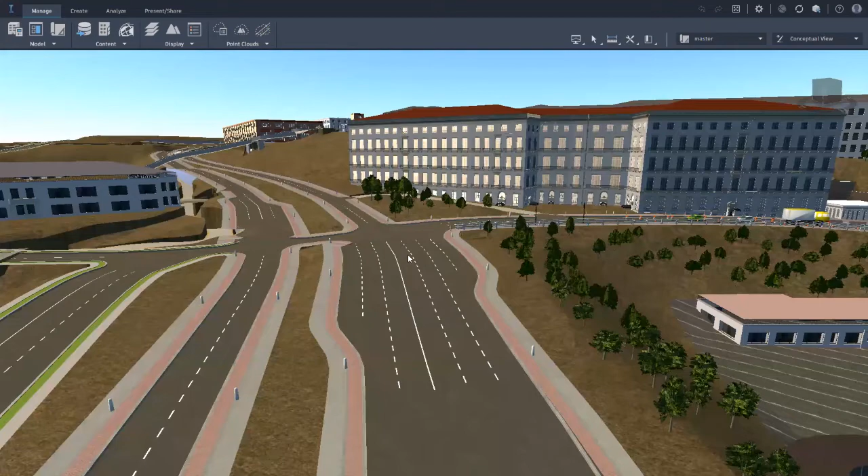Hello and welcome to the new North Life Science building on SDSU campus. Coming in here from College Avenue onto Canyon Crest Drive, we can begin to see how our traffic plan is set out. We have 4 lanes here on Canyon Crest Drive, and we're able to utilize 2 of them for dedicated construction operations while using the other 2 lanes for a forward and backwards lane of traffic. This allows the road to continue operation.

To the right, we can see our general conditions layout with our trailers, our equipment laydown, material laydown, all being set up on this parking lot 16 here that we very fortunately have next to the construction site.

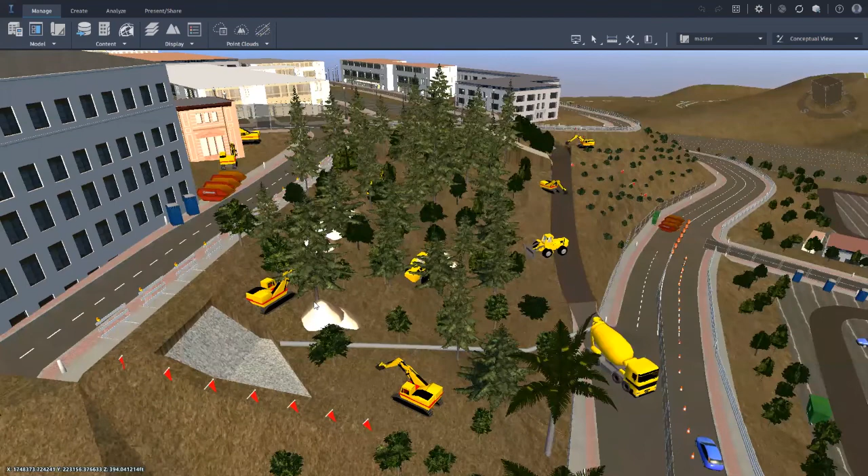You can see here now the operations taking place to begin developing this retaining wall for the massive excavation that will need to be supported. You can see here the shotcrete that is beginning to be poured in order to begin this soil nail wall.

For this project, I briefly explained the stormwater quality management plan to determine the best management practice to control the run-on and run-off of stormwater. I analyzed the soil and the site information. According to the USDA web soil survey, the on-site soil type is OKC.

The site consists primarily of hydrologic soil group D. Therefore, the site has very low infiltration and high runoff potential when thoroughly wet. In terms of existing conditions, the current site contains unvegetated soil area and blocks of shrub, grass, and other vegetation. There is no existing water treatment directly on the site.

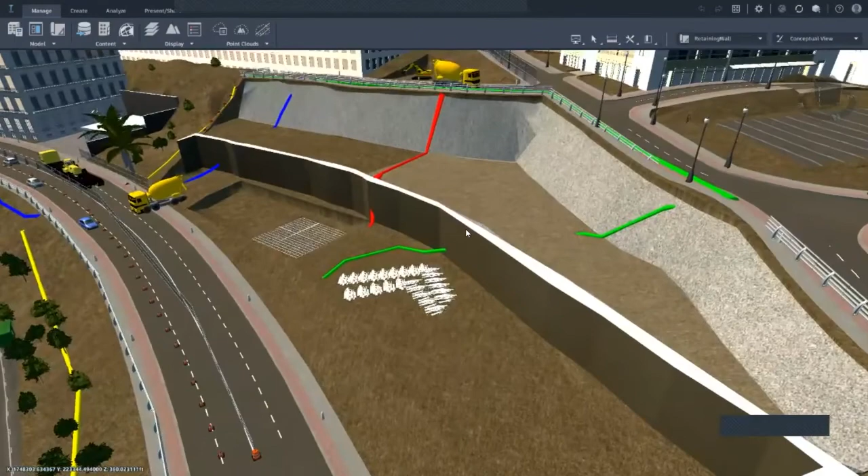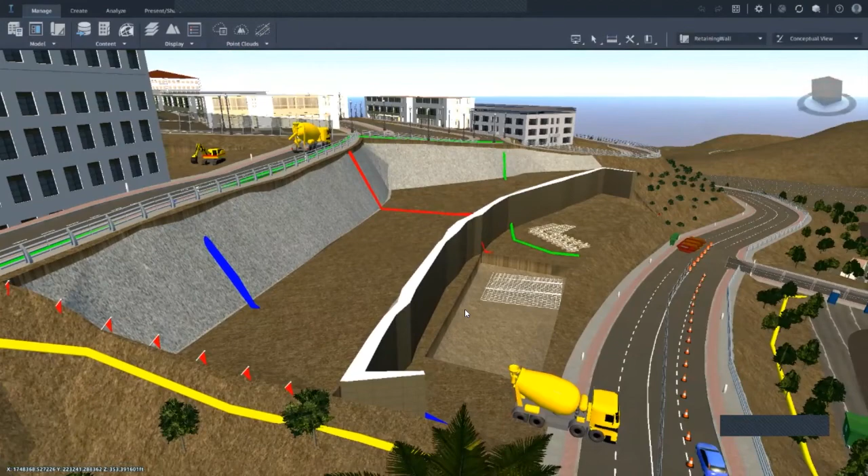Moving along now to another major milestone here for our project, which is the completion of the retaining walls. As you can see here, you can see the shape now of the soil nail wall, which we had originally set out with. However, the decision eventually came to split this slope into 2 retaining walls, with this one being a concrete masonry unit retaining wall, in order to lower the slope on this soil nail wall, which would have had to span about 50 feet. Really just not necessary, and overall just considering safety above everything in this.

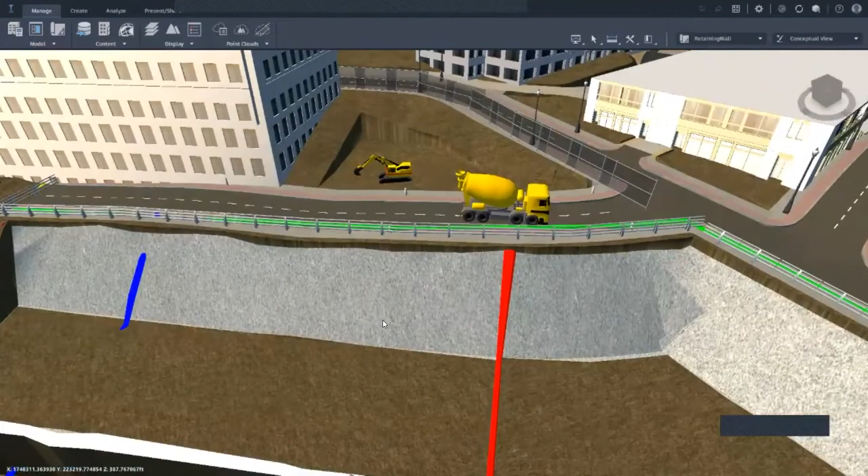We can see the development of the foundation phase with rebar being set in place. We have concrete trucks getting ready to pour. We have formwork laid out. And as we see with the progress on the sunken plaza, the previous building has now been demolished, and the same sort of process going on with just final grading and site concrete ready to go in here.

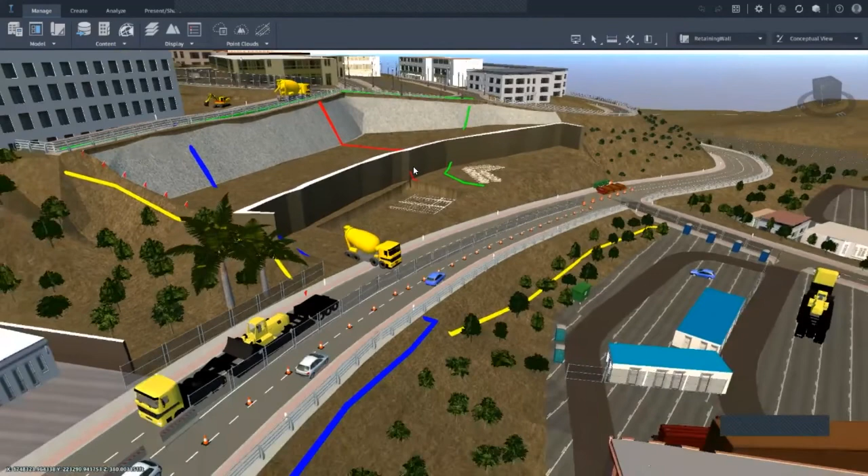You can see the utility lines that we modeled just to show that at this point, we can really start hooking up the existing utilities to our new site now that the earthwork has been completed. And now the project is ready for the structure to rise.

The project is scheduled to start on January 21, 2022 and finishes on May 26, 2024. The project duration is about 28 months and 74 days are allocated to pre-construction activity like trade buyout, shop drawing, delivery and fabrication of long lead items. We expect long delays in the preparation of the site. Specifically, the steep slope will need heavy excavation.

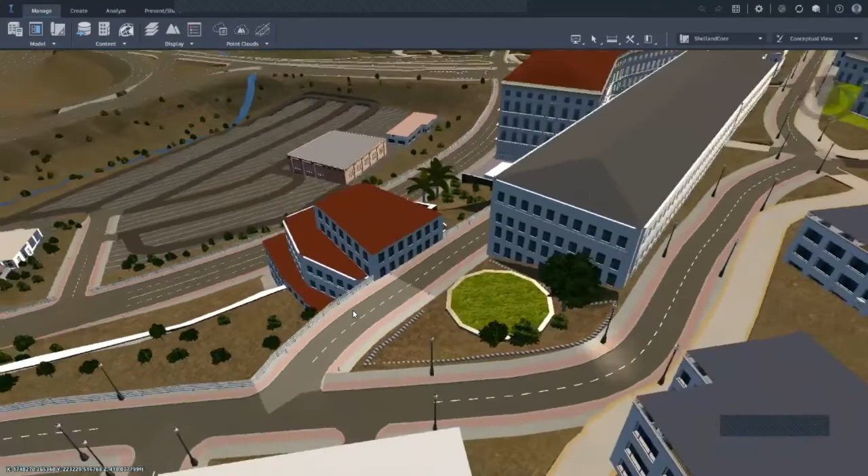And so now we conclude with the final product of what we believe this site can really produce. You can see this sunken plaza is now complete, and really the main thing with this building is just the ability to access it from Aztec Circle Drive here at the top and Canyon Crest Drive at the bottom.

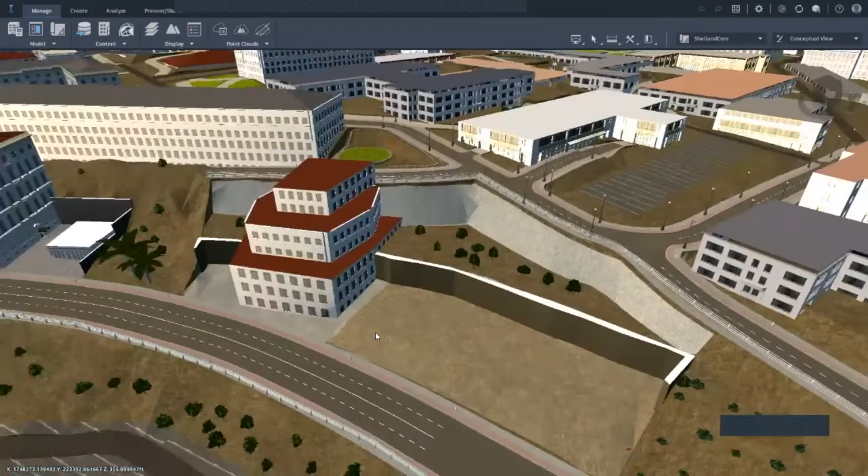Really a lot of space still on the site to do maybe future developments, perhaps a parking lot. There's really a lot of design considerations here. But overall, this new building just simply adds to an already great campus and something to definitely be proud of looking back on. We have now concluded this video.